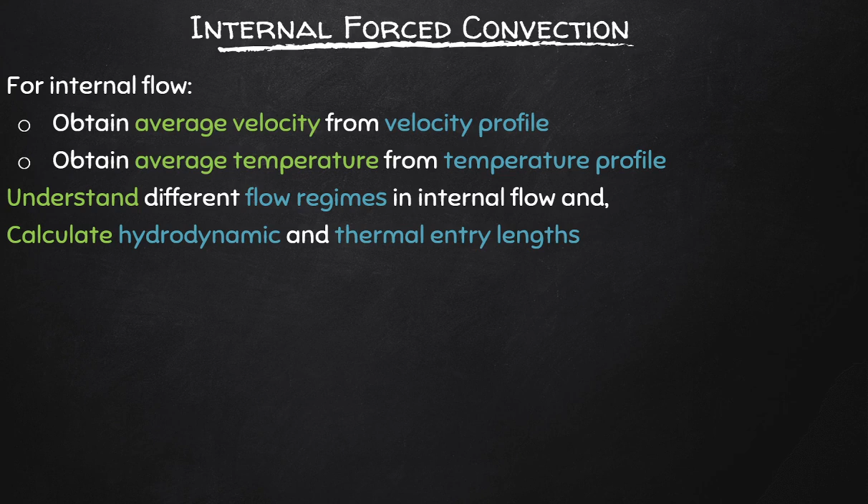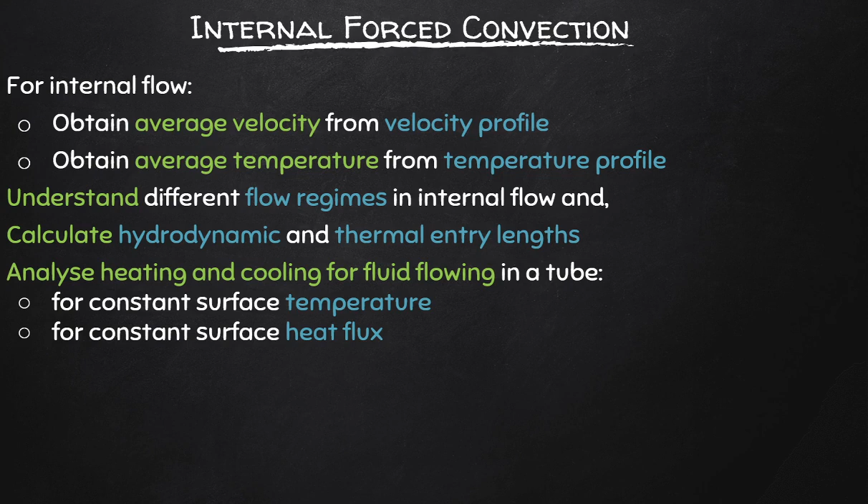We'll also analyze heating and cooling for fluids based on two cases of constant surface temperatures. You can think of these as coming about when you have latent heat of evaporation or condensation, like at the top of a distillation column or at a reboiler, and also constant surface heat flux. If there's a constant rate of heat flux, then we tend to use other equations depending on the application.

We'll also consider pressure drops, which we have now become quite used to in piping system design, as well as friction factors, and also the Nusselt number for cases of fully developed laminar flow, as well as turbulent flow, of course.

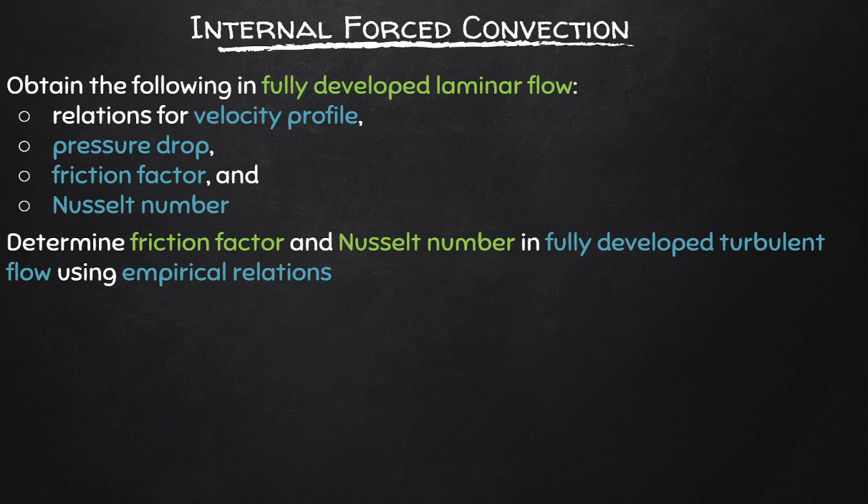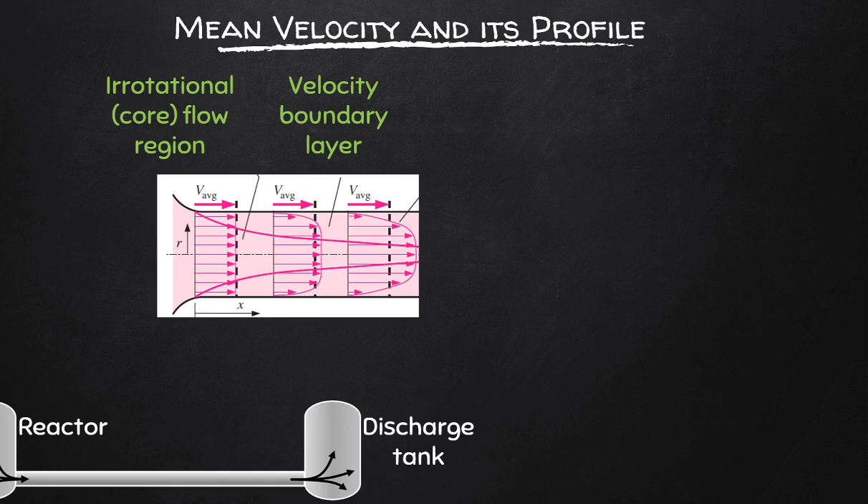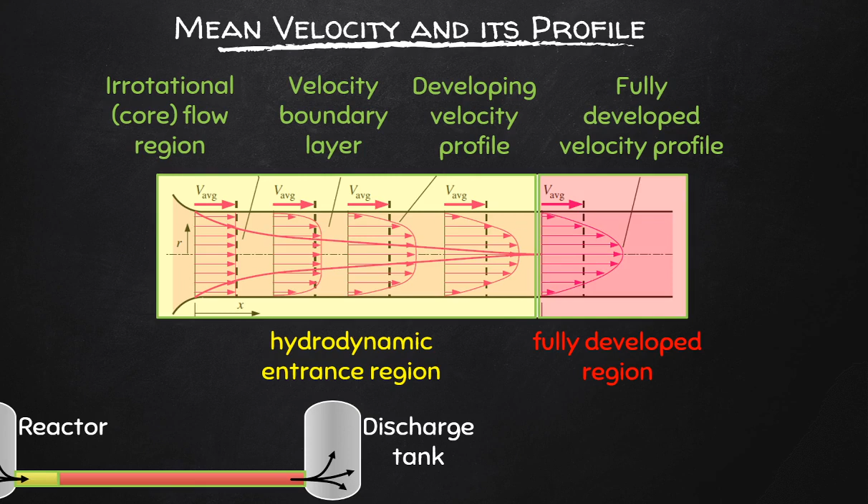Now this leads to the onset of a velocity profile inside the pipeline, which develops more and more and eventually becomes a fully developed flow at some distance inside the pipe. The region where the flow is still developing is referred to as the hydrodynamic entrance, and the fully developed flow regime obviously will follow after the hydrodynamic region.

Once we have fully developed flow established, it is quite easy to determine things like the average velocity, the Reynolds number, as well as other things like the convective heat transfer coefficient, the Nusselt number, fluid properties, etc. So we like fully developed flow, and as chemical engineers, we tend to have very long pipelines where these flows will be established as fully developed. But nonetheless, we also want to take cognizance that we could have developing flow regimes as well.

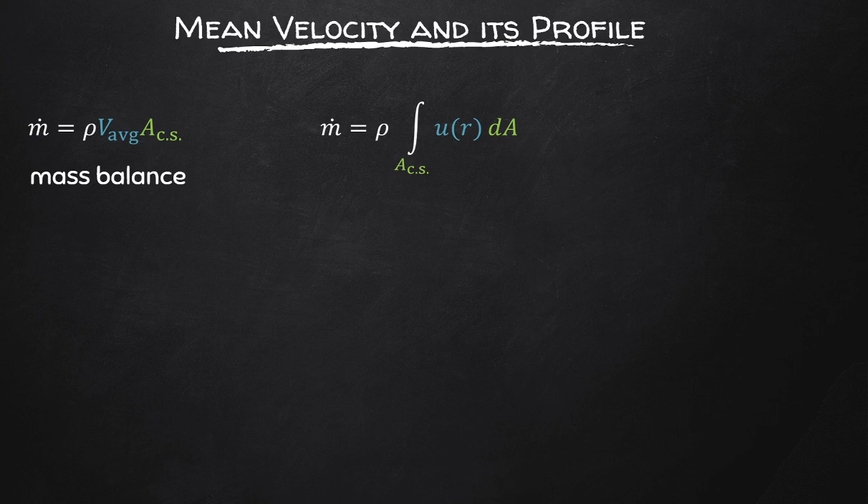So for the case of the average velocity for the fluid, we can use the conservation of mass law to determine this. It comprises the following integral for the cross-sectional area, as shown here, where the velocity boundary is taken from the wall to the center of the pipe. So obviously we integrate then from r equal to 0 and then r equal to capital R.

Now since the density is constant for an incompressible fluid, we can rewrite the equation as follows. We take rho over, and then we can also consider the following relation where the cross-sectional area changes with a change in the radius. As we integrate the radius, obviously we integrate for the cross-sectional area. But since the cross-sectional area itself is a constant, we can obviously arrange the equation again.

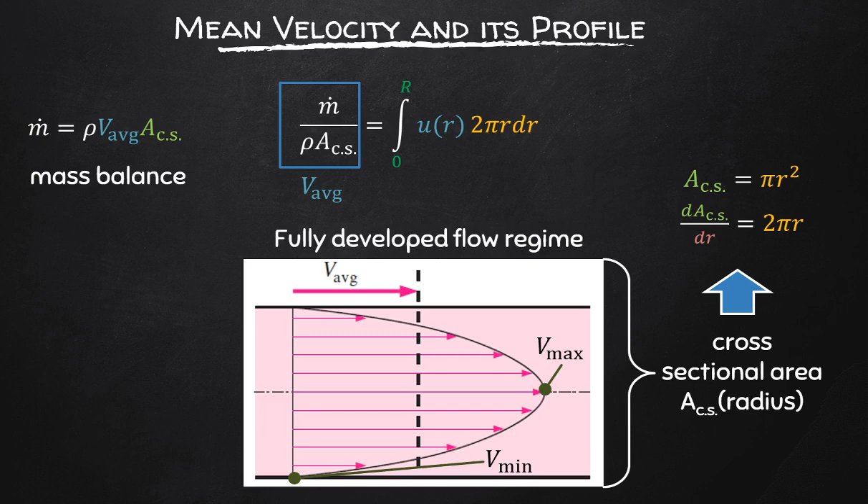And then we end up with an expression where we integrate for the average velocity between the two boundaries, where the average velocity is simply the average between the Vmin, which is taken as 0 because of the no slip condition at the wall, and the Vmax, which is obviously at the center of the pipeline. And we have seen this before - we know that the average velocity is simply these two velocities added together and divided by 2.

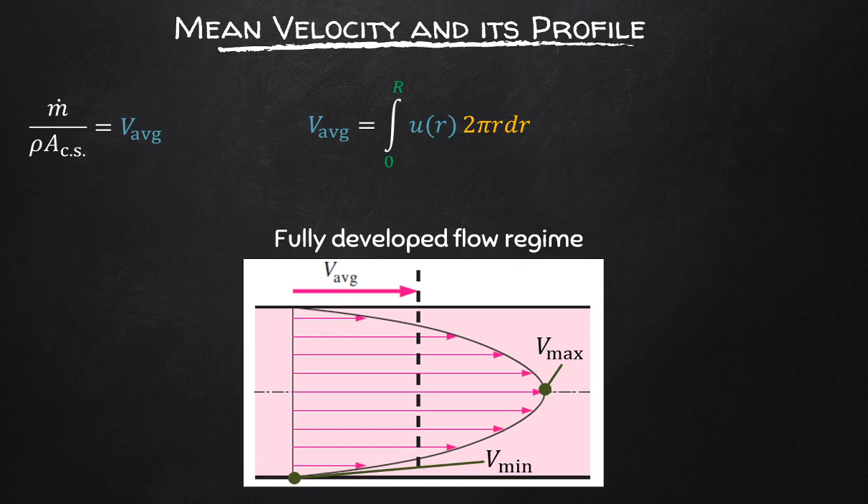Now, what of the thermal boundary layer? What does this look like exactly? Of course, there would also exist a developing region, and we refer to this developing region as the thermal entrance region of the pipe or of the flow through the pipe. And this is followed consecutively by a fully developed flow region, as shown here in the red.

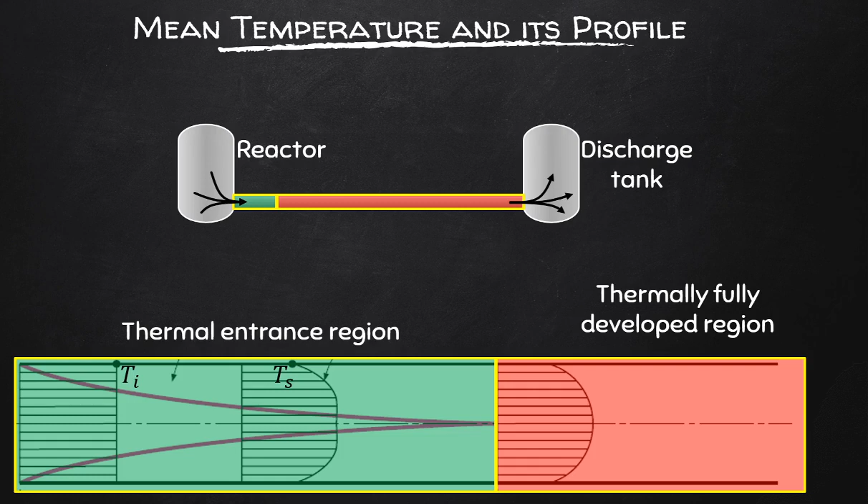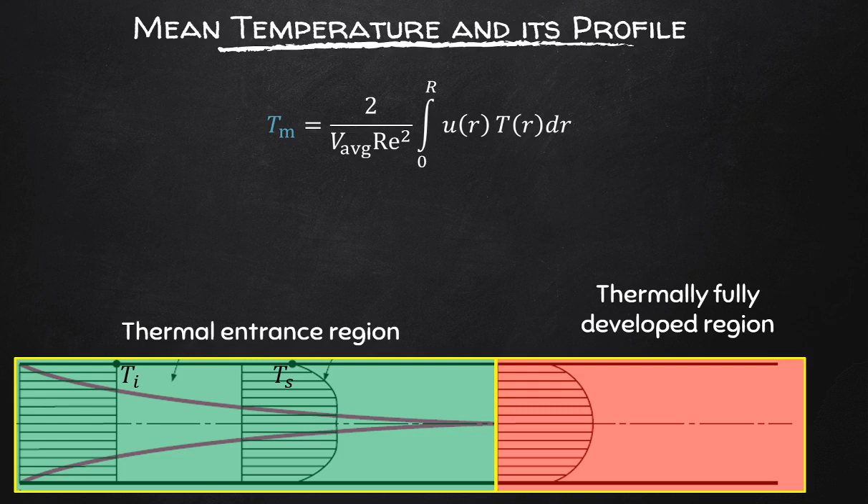The following equation is used to describe the average thermal boundary temperature for the fully developed region. I won't get into the derivation - it's not necessary for this course. The following equation we all know all too well.

So this is a recap on what we have already covered. And first off, we know that below certain Reynolds numbers of 2300, flow is laminar.

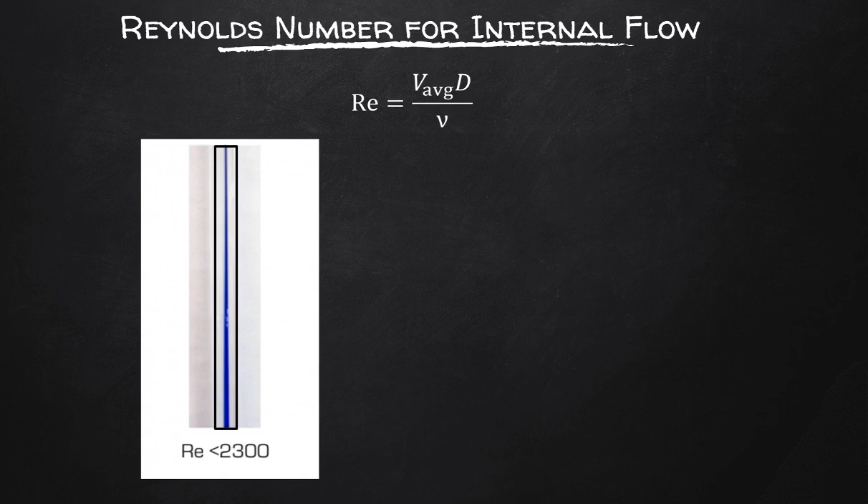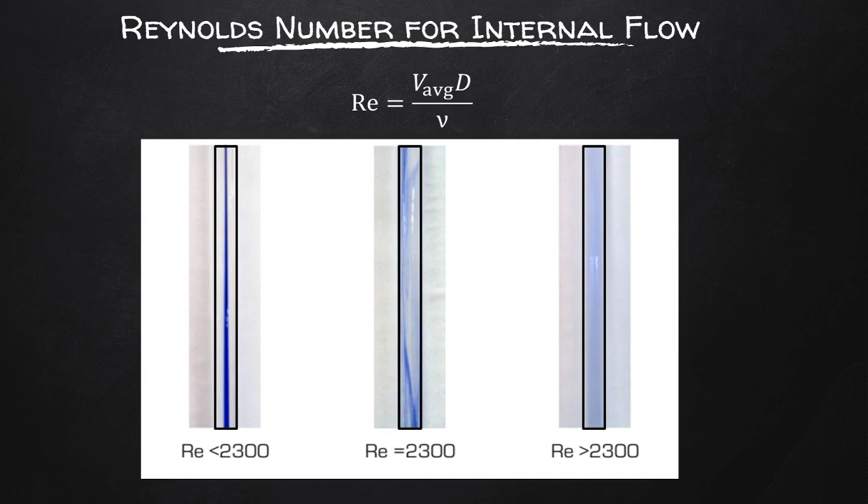Flow is transitional and then turbulent. This is from one of the textbooks, but for piping systems design, we tend to look at transitional flow as between 2300 and 4000, and anything above 4000 you will definitely have turbulent flow. You can also have laminar flow past these Reynolds numbers, up to I think they've measured it up to 10,000 Reynolds number, when you really have no surface roughness at all. You can get laminar flow at very high Reynolds number, but those cases are really rare. We tend to have these sort of cutoffs, and my recommendation is to follow the piping system textbook rather than the heat transfer textbook. Where you work with heat transfer, use the heat transfer textbook. Anything regarding piping system design, rather use the piping system design handbook.

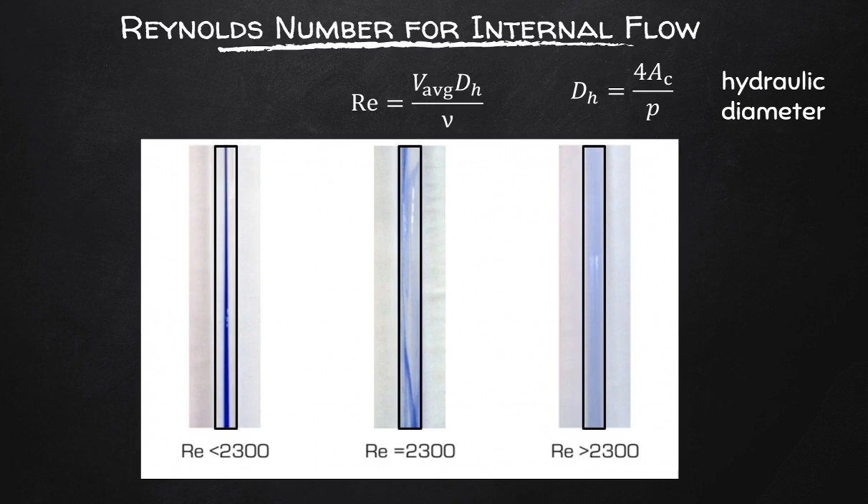But what you may not be familiar with is that there exist different forms of the Reynolds number depending on the geometry of the pipe. The change comes in the form of what is known as the hydraulic diameter. For the case of cylinders, the hydraulic diameter is simply the diameter of the pipe in question. For square and rectangular geometries, the following equations are used instead to determine the appropriate hydraulic diameter to use with the Reynolds number when calculating it.

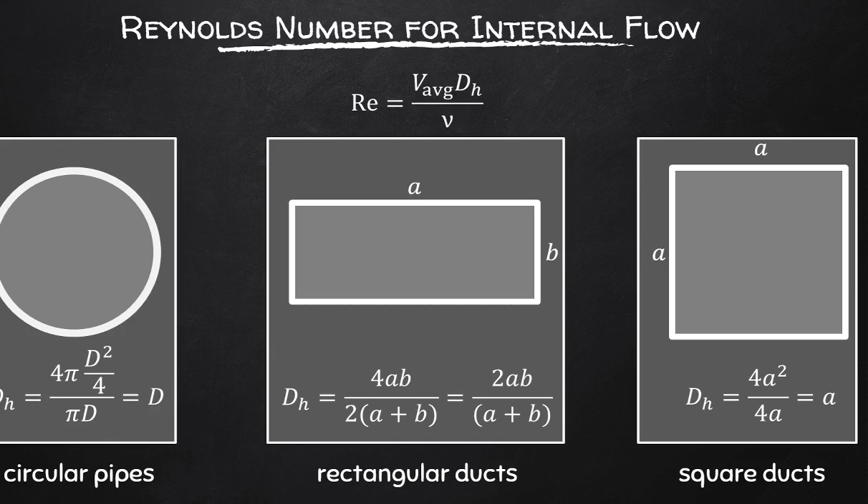And obviously the Reynolds number is qualitative. We don't report it with decimal places. If you do so, I will probably just mark you incorrect for that entire question, because that's common sense - it's irrational to give decimal places. Understand the Reynolds number and its use. It is a qualitative value. It does come into play when you have to calculate Nusselt number, for example, but when you want to determine flow regime, stick to whole numbers, integers, etc.

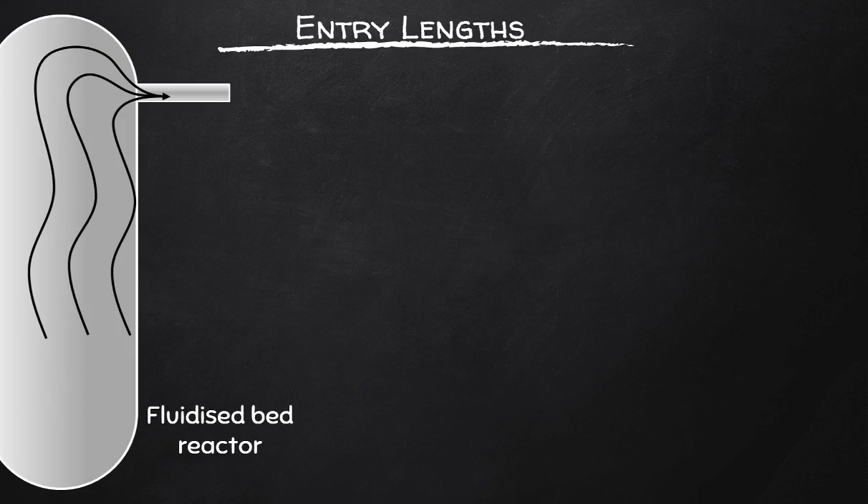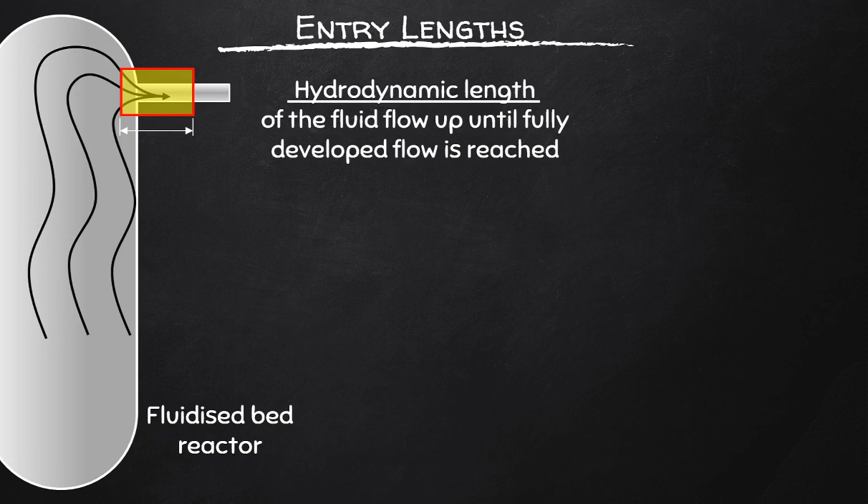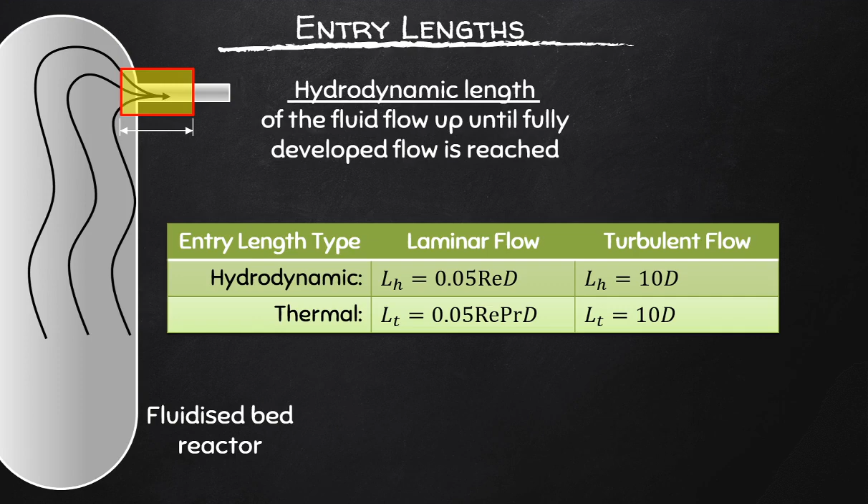We should also be familiar with the use of resistance coefficients, Kr, for pipe entrances and exits. But how do we determine the entry lengths that these resistances are associated with before flow actually becomes fully developed? Because a lot of the equations we are using assume fully developed flow through long pipes. We have two sets of equations that we can use for determining the hydrodynamic and thermal entry lengths depending on the flow regime. So when we determine the length of pipe required for a heat exchanger, for example, we then need to go and check again to see, do we in fact have fully developed flow? Is it a significant portion of the pipe? How much of the length of that pipe is taken up by a hydrodynamic entry length or a thermal entry length?

As a quick exercise before we move on, quickly pause here, try to determine these entry lengths for the following cases yourself, and then move on to check your answers. So if you've completed the exercise, were you able to obtain the following results? If you were not able to, just try again, quickly pause, and practice.

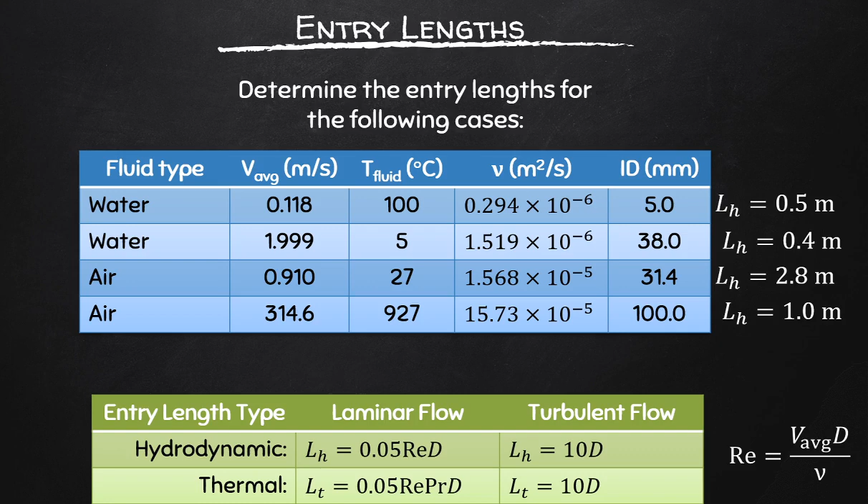At this point in the module, we are very close to now being able to design heat exchange equipment, but we will still need a bit more equations to perform such designs more accurately.

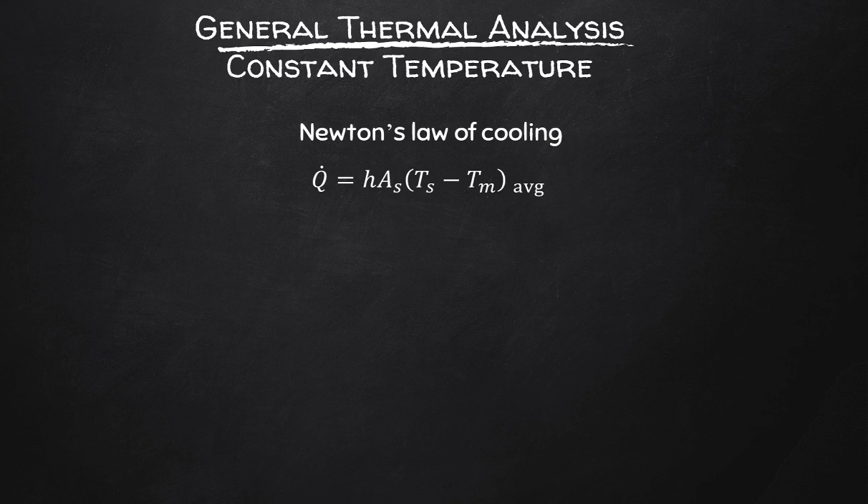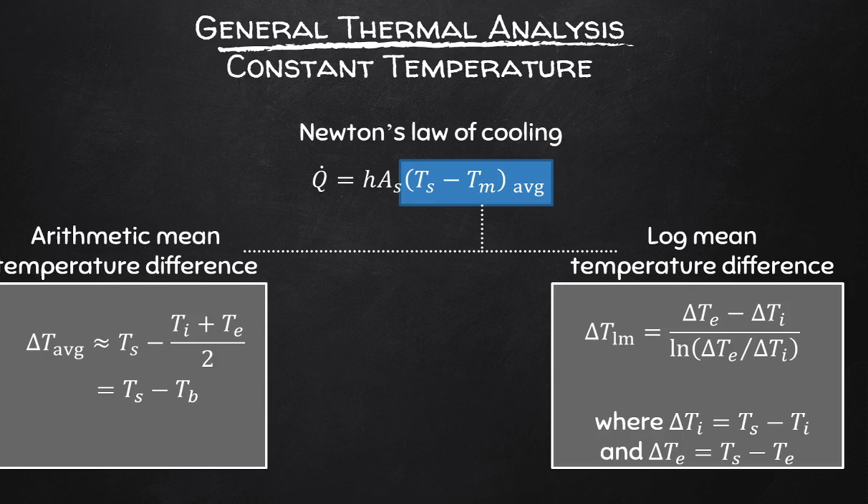Now, when using Newton's law of cooling, for instance, we have often just made use of the average temperature. However, when dealing with heat exchange systems, if you do the integration across a length of pipe for a heat exchanger, it is sometimes more appropriate to make use of the following relation, which you get from that mathematical derivation. What you end up with is what is called the log mean temperature difference. You can prove this mathematically to yourself that this is the case. This is an equation that describes heat transfer for flows through heat exchange equipment like shell and tube heat exchangers, etc. So this is a more appropriate temperature difference to be applying to Newton's law of cooling for convection.

I will now use the following example to explain this relationship and demonstrate why it is important in our heat transfer applications. In this example, we are given a steam pipe that flows inside a larger pipe, and this steam is used to heat up cooling water, or cold water, that is flowing through a smaller pipe. We wish to determine the length of copper tubing or copper pipe required to achieve the temperature rise for the cold water.

Typically, we will generally deal with steady state conditions and therefore also assume that our fluid properties remain more or less constant, and that the conduction through the copper pipe, because the wall is so thin, is negligible. Also remember that the fluid properties we want to make use of should be determined at the bulk mean temperature as shown here. So calculate the average temperature, which is the bulk mean temperature, and then determine the properties like Prandtl number, heat capacities, etc.

Okay, in this example, we determine that 126 kilowatts of energy is being transferred from one fluid to the next. Note, we don't use the log mean temperature difference here. This is just a simple energy balance, mCp delta T.

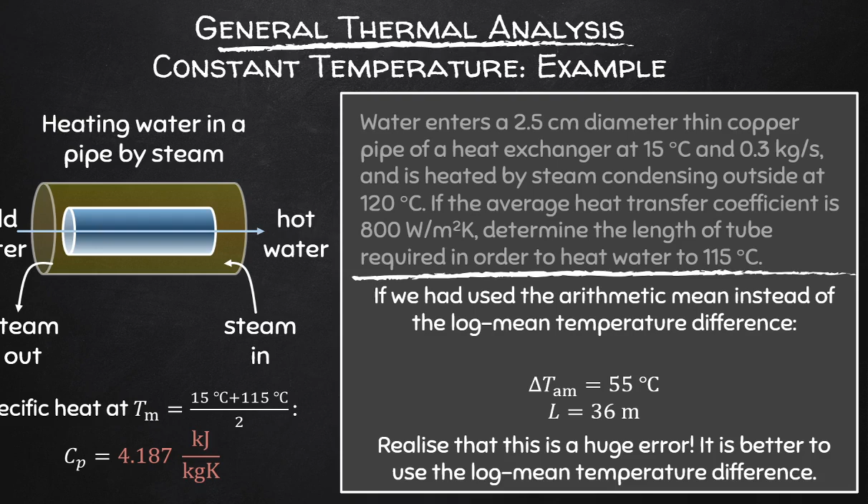In other words, we have under-designed our heat exchanger, which is a big oops in this regard. You don't want to end up with a heat exchanger at the plant that is half the size that it actually should be to perform the job.

The next few slides should serve more as a recap of work that we have already covered, but also introduce some new information to you that you may need at the moment before this is actually covered at a later stage in a chapter on piping system design, which we'll eventually get to.

I understand that you have other assignments that you need to design, things like a biogas reactor, etc. And you might ask the question, how big should my pump be, for example? Okay, so before we get into that, note that we...

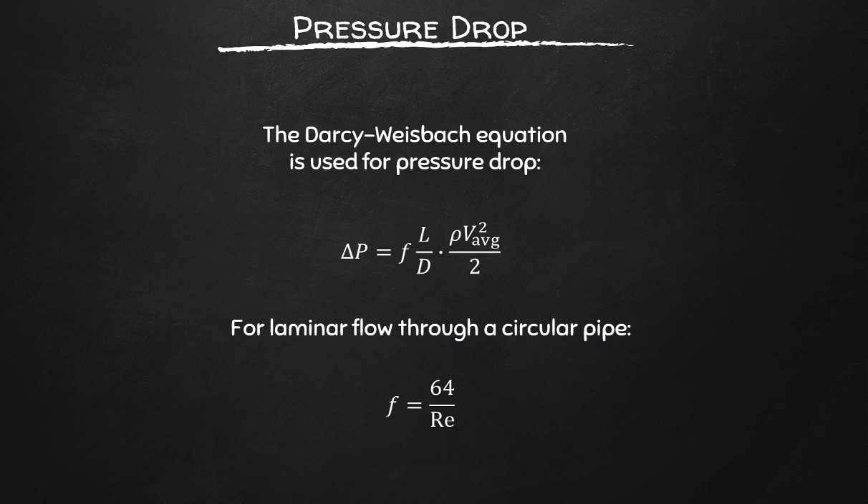We are quite familiar with the Darcy-Weisbach equation. This is introduced again in the heat transfer textbook, but we already go over this in piping systems design, as well as the related correlation for the friction coefficient F prime. And we have already introduced the following equation for F prime when we are operating under laminar flow conditions.

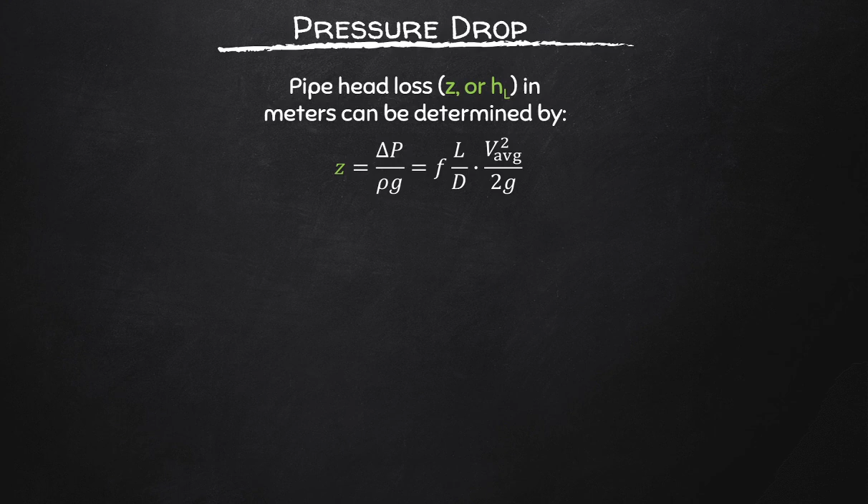And we also have another form of the Darcy-Weisbach equation, which you should be familiar with, and it has units of meters, and it is very important since this is often used to characterize the performance of pumps at certain flow rates. So we will cover this in fluid movers in the piping systems section of this work.

But what is important to note here is just that it is possible to choose or select a pump if you have a desired equivalent height of flow that is known to you.

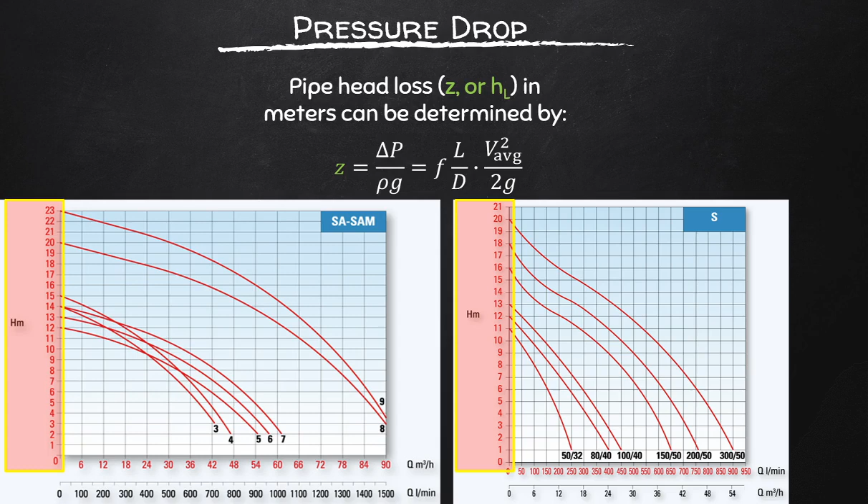The one on the right hand side is for a submersible pump, where you can actually submerge the pump into the tank. Okay, while the centrifugal pump usually connects outside of the tank, it has a pipe going to it instead. Okay, so just note the subtle differences here, and note that the higher the flow rate, the lower the pressure, the height difference, the delta P, that can be delivered by that pump.

Also remember that before we came to the Darcy-Weisbach equation, we were first introduced to the Hagen-Poiseuille equation. And this can be used in the case of horizontal pipes only, while the Darcy-Weisbach equation is probably a more appropriate one to use in all our applications, seeing as we are going to have elbows and T's and all sorts, and our pipes are generally not going to operate in the horizontal format.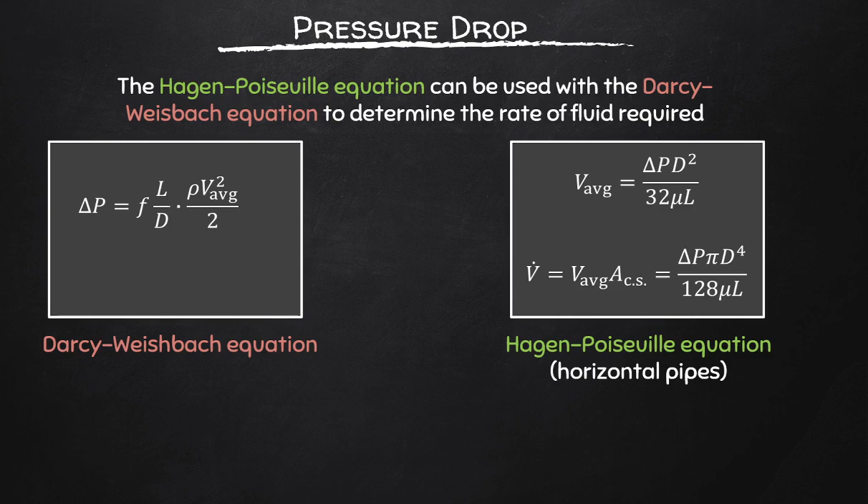Often in industry I see installations of shell and tube heat exchangers that are in the vertical direction rather than the horizontal. So I would say stick to the Darcy-Weisbach equation. It is a more accurate equation to use because you also introduce the F prime to this equation to factor in for losses and frictional losses.

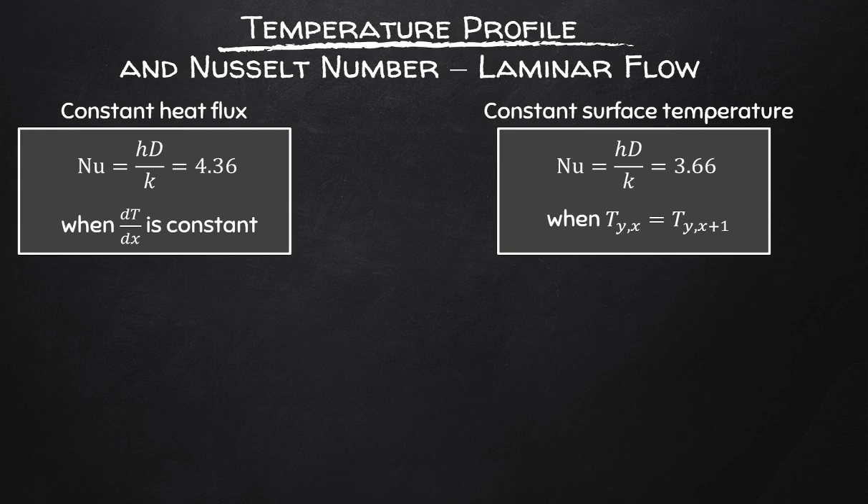Okay. Flow forced through internal orifices and pipes, etc. obviously of course have their own specific equations that we would use to determine Nusselt number, depending on whether we are working with a constant temperature gradient and isothermal flows.

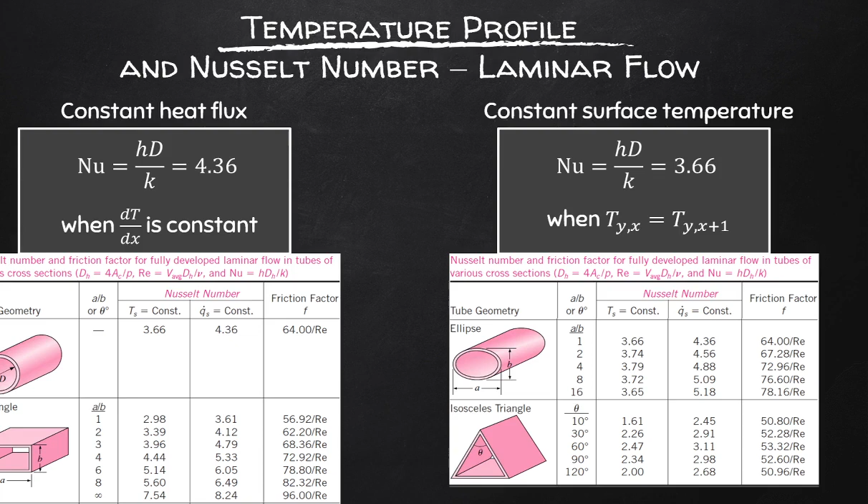Now the textbook also provides additional information for these correlations specific to geometries that you might come across. These are usually the circular one, the pipe, that is the typical one that you would use, but sometimes you would get a rectangular one or ellipsoidal or an isosceles triangle, which I can't say I have seen in industry before. I've seen rectangular shape or square shape and circular shapes, obviously.

I stick to those. I like the Colebrook. You can use the Churchill if you do a lot of programming, which is much more accurate. But you also see that the difference in the friction coefficient is so small, 0.144, 0.145. Nothing to write home about.

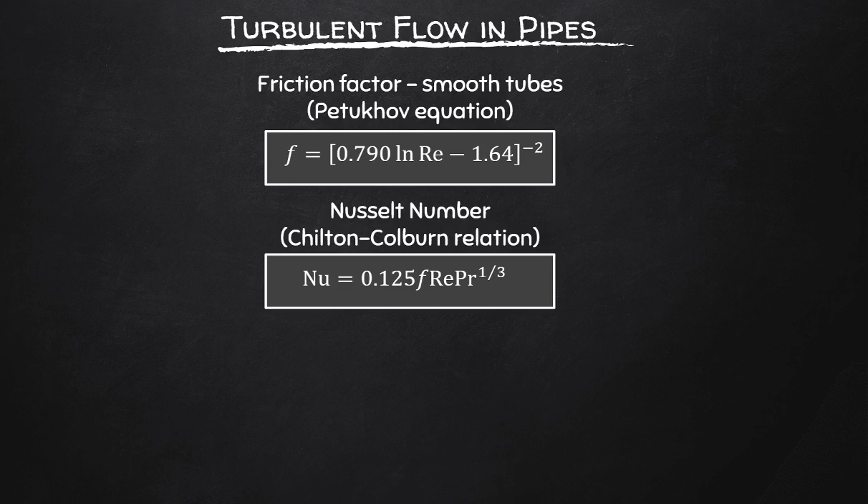So to determine the Nusselt number inside pipes, the following relationship can also be used. It's the Chilton-Colburn relationship, but there's a second one which is more often used, called the Dittus-Boelter equation. The reason why this is used is that it contains this exponential n, which varies depending on whether the fluid in question is being heated or is being cooled down.

So if you're heating the fluid, then use n equal to 0.4. If you are cooling down the fluid, use n equal to 0.3. And just keep tabs of which fluid is being heated and which one is being cooled, because we tend to use steam, for example, in industry to heat up fluids. So the steam is being cooled, but the fluid in question is being heated. Just make sure that you understand which fluid is which and which n should I be using for which fluid.

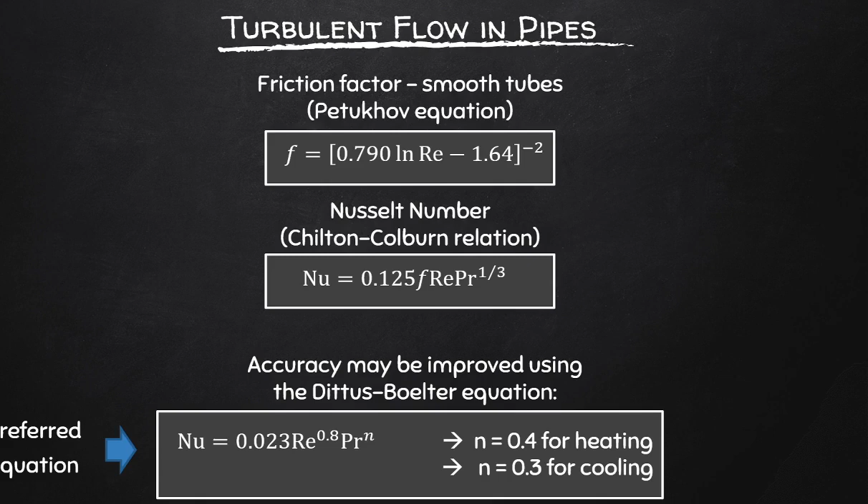Now, if however there exists very large temperature differences, you can't use these equations. These equations are only for where you have small temperature differences between the fluid and the solid interface, so for a pipe, for example. In the case where you have very large temperature differences, you would have to use the Gnielinski's equation instead.

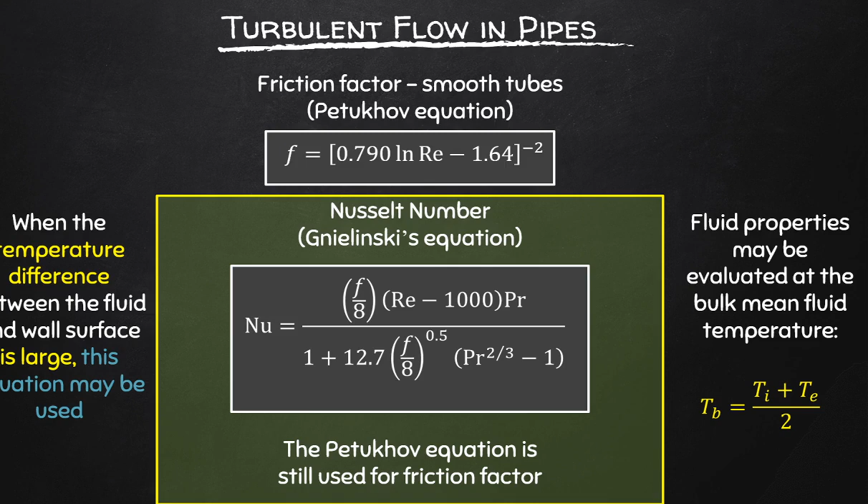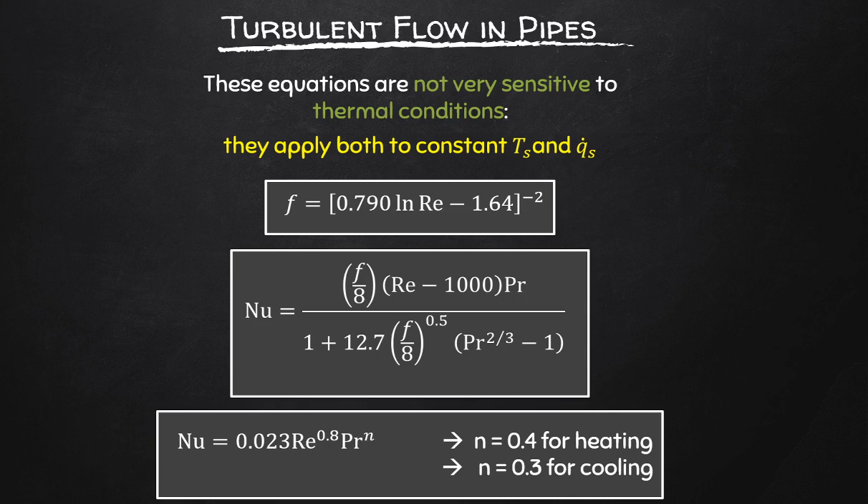Now, fortunately, these equations are not that thermally sensitive, so you can apply them irrespective of whether you're dealing with isothermal conditions or constant heat fluxes.

And again, as before, there are also specific equations that should be used instead if you're dealing with liquid metals that are molten. So sodium, this is typical if you're dealing with things where you are storing energy, for example. In the past, I know they used sodium mixed with mercury for some applications, an amalgam. So we might still come across amalgams in industry, and then these equations would be preferred.

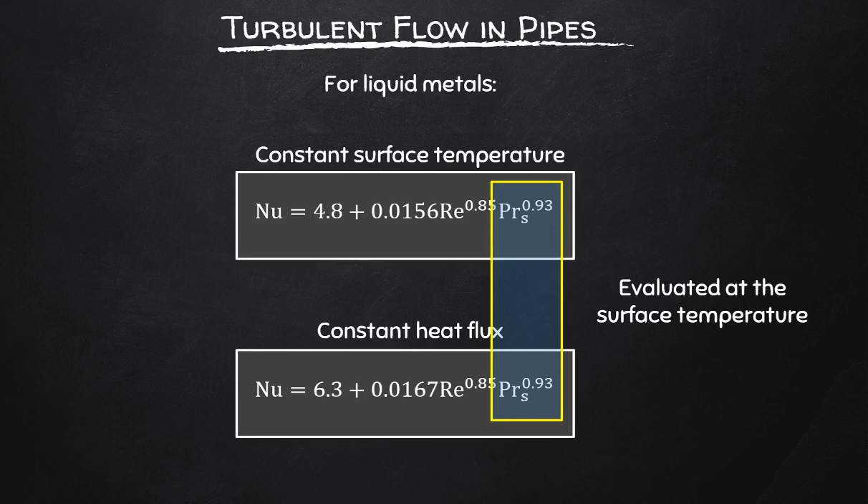And the Prandtl number here, just pay attention. This Prandtl number should be determined at surface temperatures of the pipe or the conduit in question.

To end off the lecture, let us go over a quick example. Water is being heated in this example through 5 tubes. So it enters 5 tubes, and the tubes are maintained at an isothermal temperature of 60 degrees. We also are then asked to determine not only the steady state heat transfer, but also the length of the tubes that are required in this case.

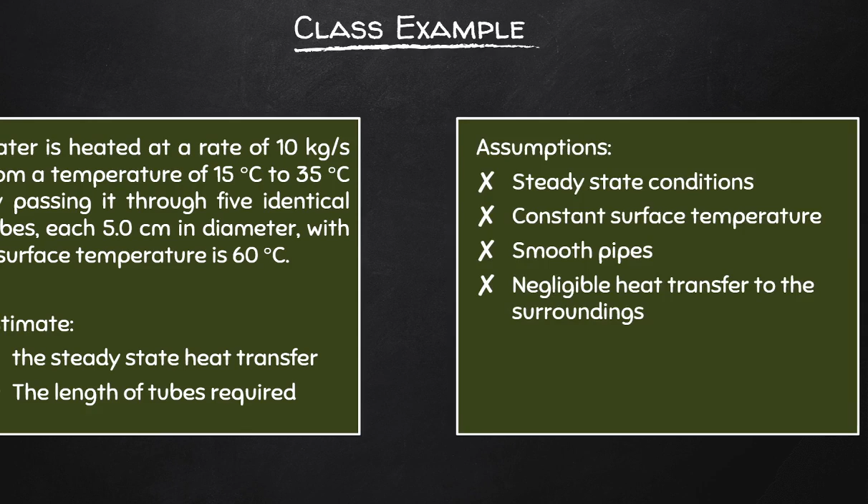Now, we don't know the entry lengths. It's kind of a catch-22. We first need to determine the length, and then we need to check the entry lengths to make sure that the following assumptions that we are going to make still hold. One of the assumptions that I think I haven't put here is that we have fully developed flow, because we have to then select our equations based on those assumptions, of course.

Before we immerse ourselves in the equations, it is often helpful to plan our strategy. So first off, we can calculate the heat flow quite easily for part A, which is then required for solving part B. Now for part B, we need to know what steps need to be taken before we can determine the length of pipe. We first require to know the velocity of the fluid through each of the 5 tubes, because we have to determine the Reynolds number. So for the next few steps, this is kind of how I tend to think - working backwards first is maybe a good thing, because we know what we want. At the end, we want to determine the length required.

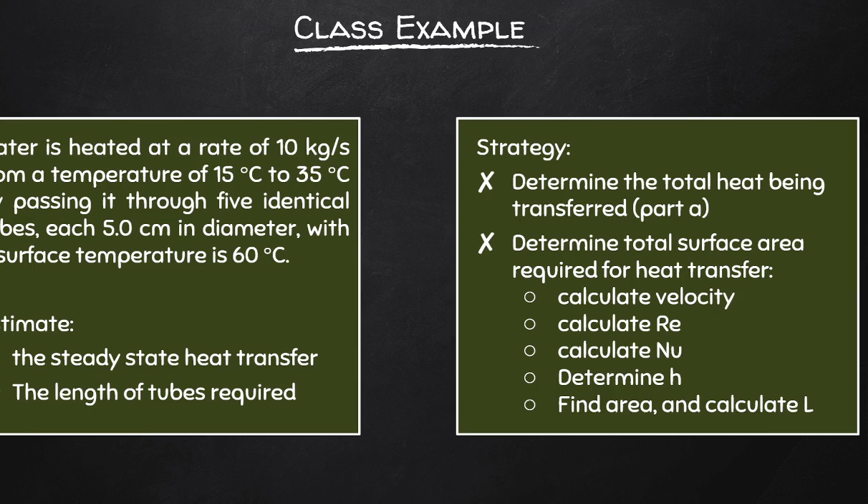So for this, I need to determine the area of heat transfer. To determine the area, I need the convective heat transfer coefficient via Newton's rate equation. For part A, I calculate Q, which is used in Newton's rate equation, and for this I need the coefficient. For the convective heat transfer coefficient, I need the Nusselt number, and to determine that I need to first select the right equation, so I need to know the flow regime, and I need the velocity to determine the flow regime. So you can see how I've planned the different steps I'll need to take. First, velocity. Let's get into it.

The energy transferred is easily determined using a simple energy balance, m Cp delta T, no log mean temperature difference. We obtain a value of 836 kilowatts that needs to be transferred.

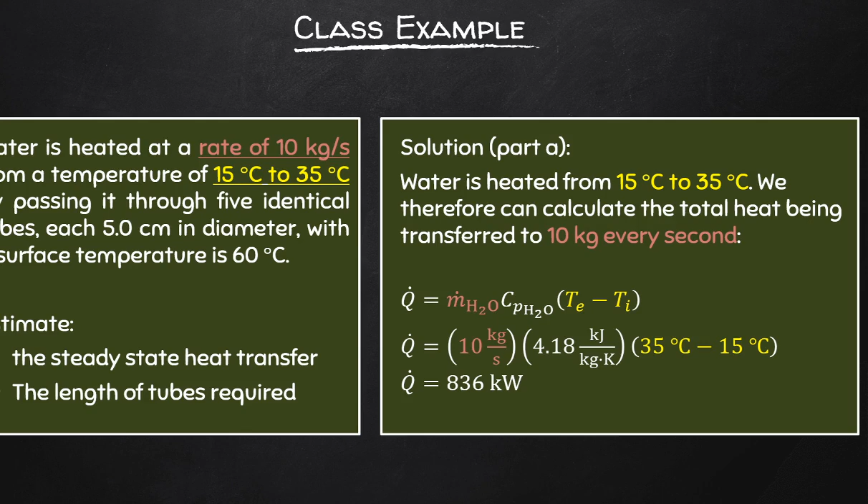For part B, we determine the velocity through each of the pipes, dividing by the number of pipes, which is 5. Then we determine the flow regime, which gives a Reynolds number of 57,000. Since this is greater than 10,000, we have turbulent flow through each of the pipes.

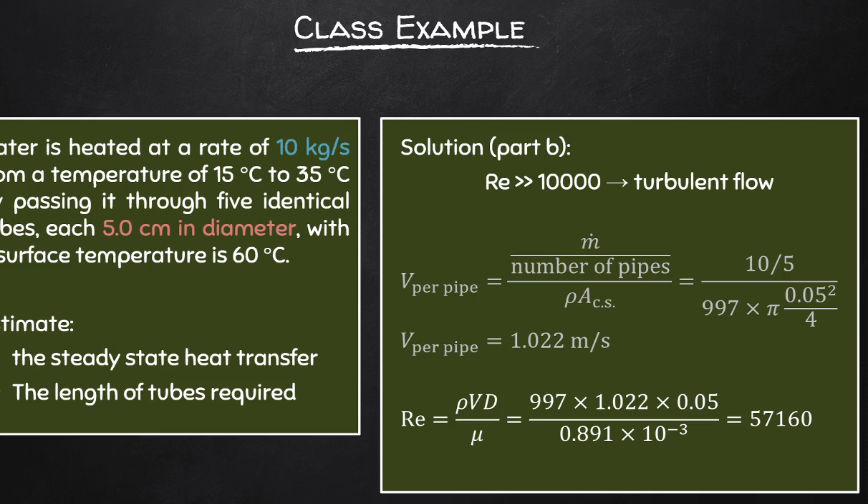I think I mentioned before 4,000 as the cutoff. I don't know what I was thinking, it's actually 10,000, so just correct that. Check your piping systems textbook; the cutoff criteria are available there for you. Just make sure you correct for any errors I might have spoken about in this lecture.

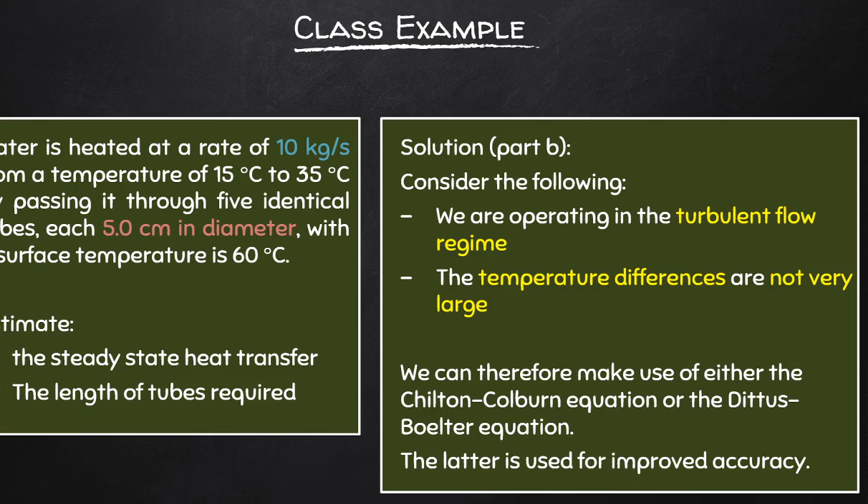Next, we consider two things: the flow regime and the temperature difference between the water being heated and the tube temperature, which is 60 degrees isothermal, in order to select the correct Nusselt number equation. Based on this, we could use the Chilton-Colburn equation or the Dittus-Boelter equation, but the latter is more accurate, so we'll use that. We determine the Nusselt number as shown, and use this to determine the convective heat transfer coefficient.

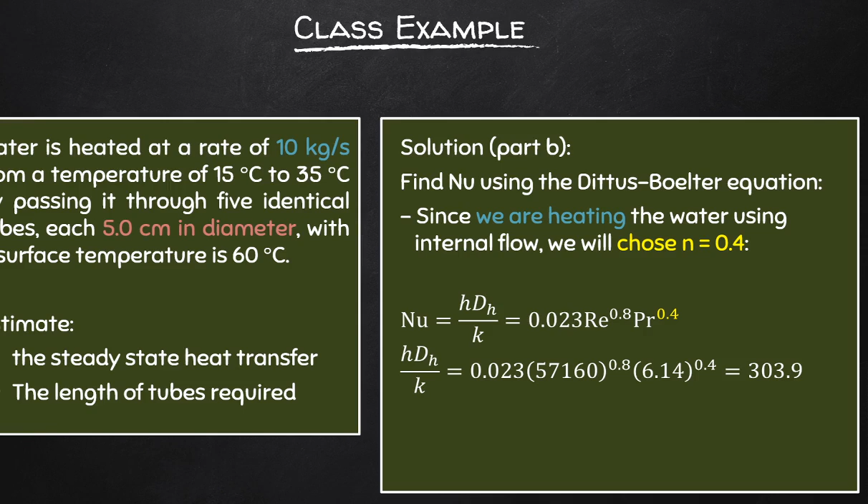We also calculate the convective heat transfer coefficient using the Nusselt number and determine it to be 3,700 watt per meter squared Kelvin. Next, we determine the area required for heat transfer, and remember the units: we calculated the heat transferred in kilowatt, so make sure you use watt instead.

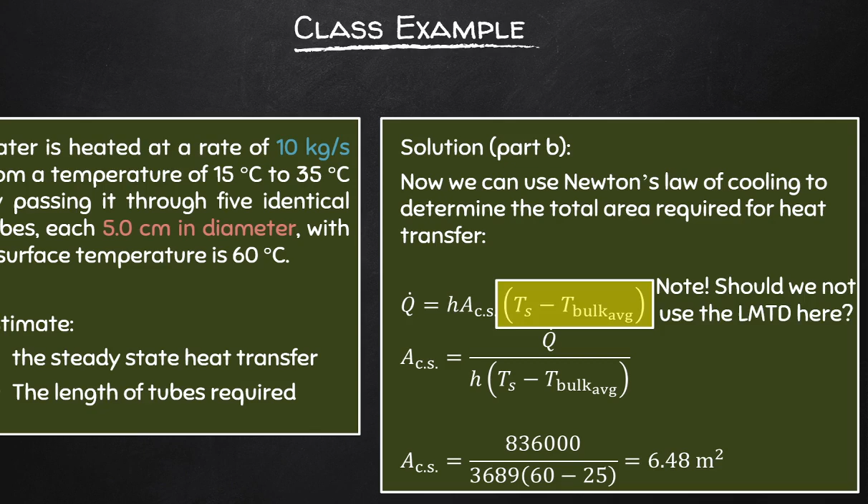And then we ask ourselves a very important question: should we have used the log mean temperature difference here? What do you think?

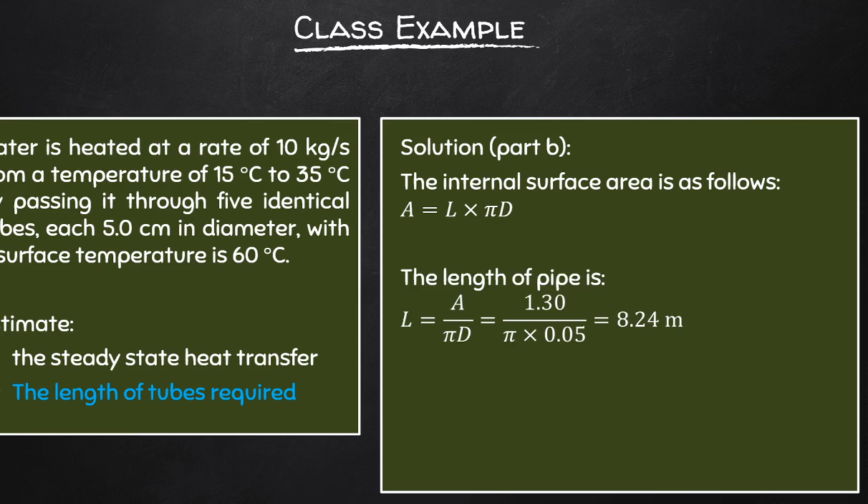After this, we can determine the total length required based on the total surface area needed for this heat transfer application. You can either determine the total length directly and then divide by the number of pipes, or determine the area per pipe and then the associated length for that pipe. Using the equation for internal surface area shown here, we calculate the length as 8.24 meters per pipe.

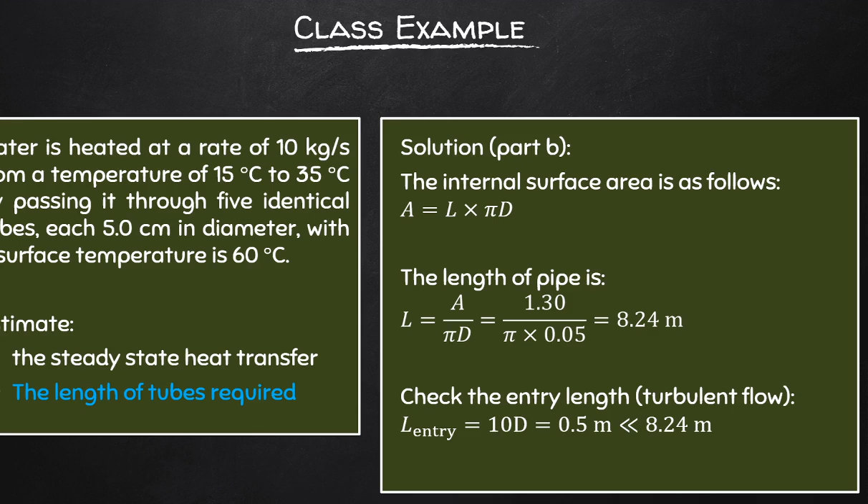The last thing we should do is check the entrance length, making sure it is not a significant portion of the total length of pipe required; otherwise we cannot use the equations that apply for fully developed flow. We would instead have to look for equations for transitional or developing flow regimes.

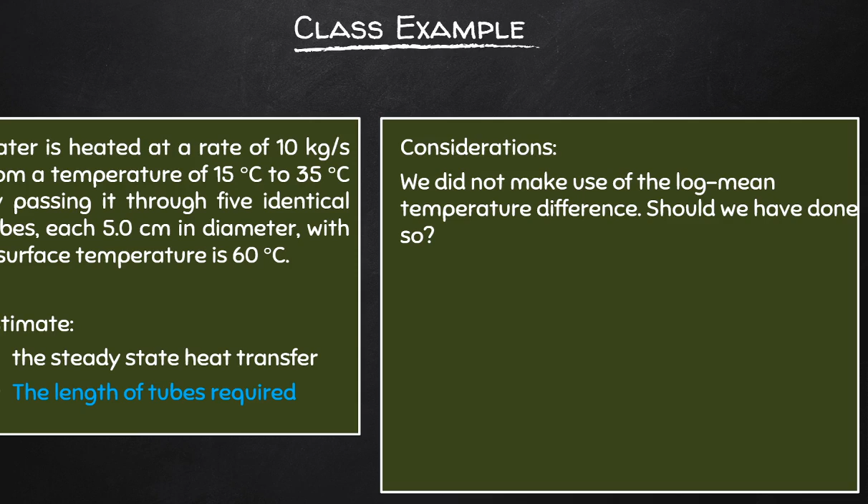Now let's look at that previous question that popped up: should we have used the log mean temperature difference? Let's see what happens to the final answer if we did. First, calculate the log mean temperature difference as shown, which is 34 degrees Celsius. Next, determine the heat transfer area, which is 6.66, and then finally determine the length of pipe required and compare the answers. Here we have a difference of 0.24 meters, so a 240 millimeter difference.

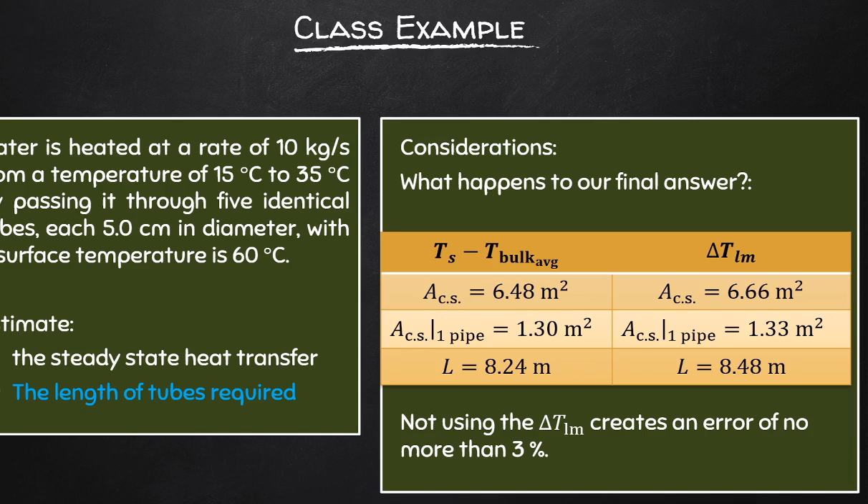Is that significant? It creates an error of 3%, which is okay, I suppose, but for piping systems design we already add contingencies, etc. This is avoidable nonetheless, so the error is okay, but I would have preferred to actually use the log mean temperature difference just to be on the safe side.

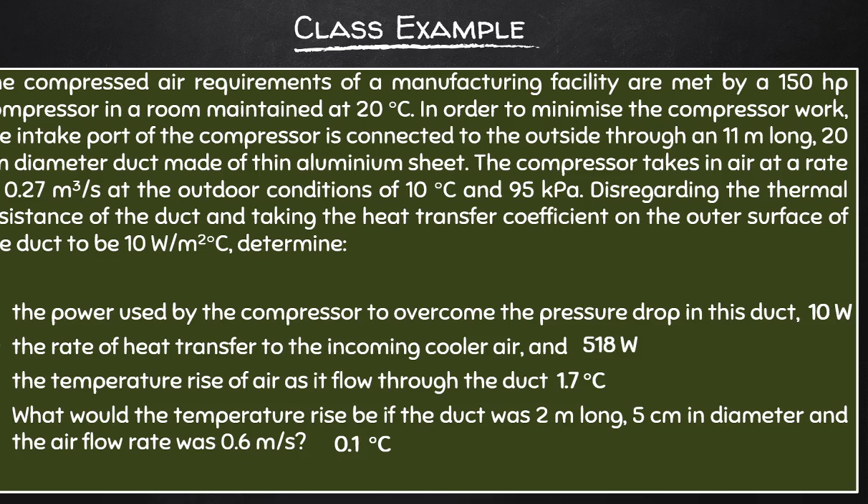And with that we end this lecture with another example, but this time I'll leave it up to the student to try it out themselves. See if you are able to obtain the following answers as shown here. And with that we end this lecture on forced internal convection. See you guys soon.